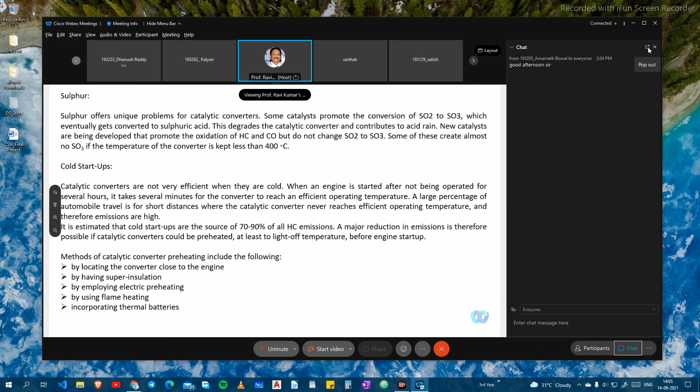We are planning our examination on the 16th at 4:30. Hello? Yes sir. 4:30 to 4:50, it's okay sir, for 20 minutes. The syllabus is already announced, and there will be 20 questions. It's 4:30 to 4:50, it will end. Total will be multiple choice only, a minor examination.

Okay, then I will start this thing, so my class today. Today we'll discuss about...

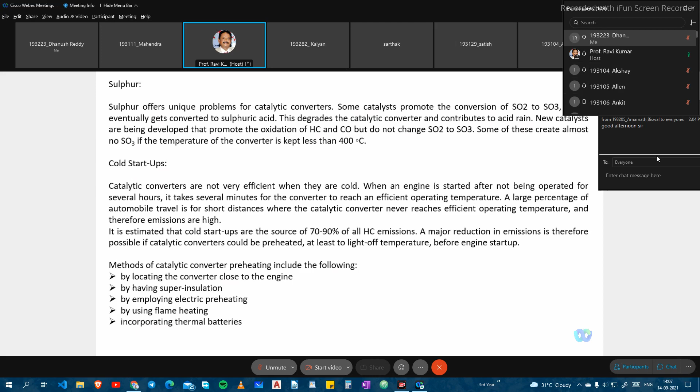This method of catalytic converter preheating includes the following: locating the converter close to the engine, having super insulation, employing electric preheating, using flame heating, and incorporating thermal batteries. Basically, we have discussed two-way and three-way catalytic converters and seen their design. The catalytic converter will help reduce emissions of NOx and SOx by having chemical reactions, and photochemical reactions will also be avoided by using this.

The most effective way, this is another way we are going to use exhaust gases. This is called the EGR method, exhaust gas recirculation method. The most effective way of reducing NOx emissions is to hold combustion chamber temperatures down.

Basically, around the combustion chamber we have heating and cooling, like a cooling system around the hot combustion chamber. Around the combustion chamber we have cooling pipes and a cooling system. That's why we always have to maintain the combustion temperature inside at the same level. The range should not exceed a certain limit. If you exceed it, you will get pre-ignition and a lot of problems.

You have seen this while discussing the combustion chambers, particularly regarding NOx and SOx emissions, because high carbon monoxide and hydrocarbons come out from the exhaust valve to the silencer, through the silencer. At the silencer end only we are going to have this. Before going to the charge, it will be heated through the exhaust gases. What happens if you preheat the air, or preheat the homogeneous mixture? That we will discuss today.

Probably the simplest and most practical method of reducing maximum flame temperature is to dilute the air-fuel mixture with a non-reacting parasite gas. The gas absorbs energy during combustion without contributing any energy input. The net result is a lower flame temperature. Any non-reacting gas would work as a diluent.

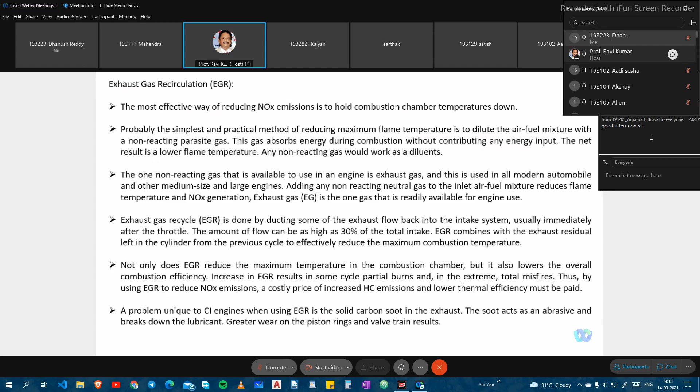Emissions may be divided into two groups: invisible emissions and visible emissions. Whatever you see in exhaust gas, particularly in diesel engines, is mostly soot formation, which has a smoke type appearance, and the smoke has a lot of things in it - this is visible.

Invisible emissions like NOx and SOx will not be visible to the outside, you cannot see them with the naked eye, but they react with the air producing a lot of things. We have carbon dioxide and water vapor, oxides of nitrogen, unburnt hydrocarbons, carbon monoxide, and aldehydes.

Carbon dioxide, water vapor - where you have a silencer end, you can see the small water vapors coming out. Oxides of nitrogen, unburnt hydrocarbons, carbon monoxide, aldehydes are invisible emissions. Smoke and particulates are visible emissions - small particles coming out are visible emissions. Out of various individual emissions, carbon dioxide and water vapor are considered harmless compared to others.

Carbon dioxide and water vapor may not be dangerous, but hydrocarbons and oxides of nitrogen, SOx and NOx emissions add to air pollution outside the atmosphere and cause a lot of damage to people, irritating the nose, causing bronchitis, and other health hazards from inhaling these emissions.

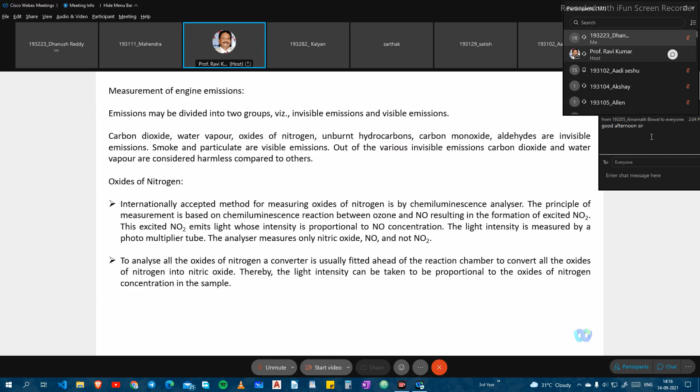This is called the chemiluminescence method for measuring oxides of nitrogen.

Basically, a photomultiplier tube is present, and a reaction tube is there where the sample gas is taken in. It passes through the NOx/CO converter, where a flow meter is also present to measure flow rate, and an O3 generator to produce ozone, showing how ozone is affected by NOx and SOx emissions. This goes to a reaction chamber, where the photomultiplier tube senses and provides total information on how many particles are coming out from the exhaust and what type of damage it causes to the environment.

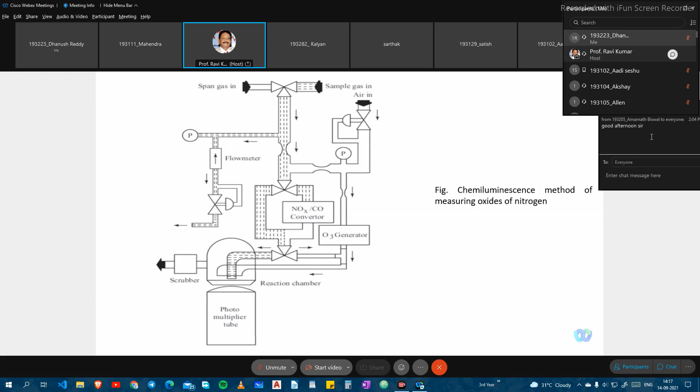Carbon monoxide can also be measured using the NDIR method of measurement.

The non-dispersive infrared analyzer, NDIR, as shown in the figure, is a widely accepted measurement instrument for measuring CO. In the NDIR analyzer, the exhaust gas species being measured are used to detect themselves. The method of detection is based on the principle of selective absorption of infrared energy of a particular wavelength peculiar to a certain gas, which is absorbed by that gas. This instrument uses non-dispersive infrared analysis for carbon monoxide measurement, as shown in the figure.

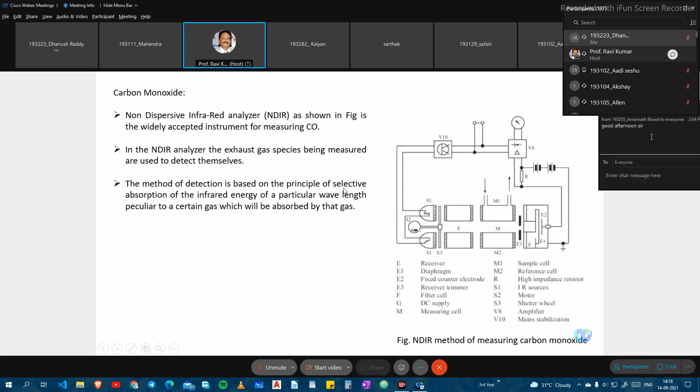Unburned hydrocarbons are also very dangerous, because whatever unburned hydrocarbons are available from the combustion chamber come out through the exhaust gases, and these lead to a lot of complications. For this, the flame ionization detector is used for measuring hydrocarbons.

This instrument, shown in the figure, is a well-established and accepted method of measuring HC. Ionization is a characteristic of HC compounds. The principle employed in the FID detector, flame ionization detector, is the formation of electrically charged particles, ionized carbon atoms, from the hydrocarbons in a hydrogen-oxygen flame. The resulting current flow, in microamperes, is measured and amplified to determine the concentration of hydrocarbons. This is one way to find the hydrocarbon percentage in exhaust gases using flame ionization detectors.

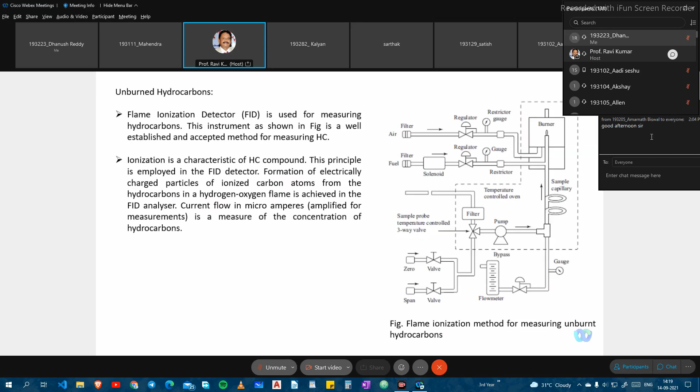Visible emissions, like smoke from a diesel engine, can be divided into three categories: blue, white, and black. Sometimes you get a blue flame, sometimes white, sometimes black. Smoke measurements can be broadly classified into two groups: the comparison method and the obstruction method.

In the comparison method, most ordinances regulating smoke emissions are based on estimating the density of smoke as it emerges from the exhaust, using smoke filters to measure what percentage comes out and what density it has.

It is also measured using a small filter paper method. Of several available methods, one commonly used is the Ringelmann chart, which shows four shades of gray as well as pure white and all-black sections.

To overcome the difficulty of reproducing various shades of gray, the intermediate shades are built from black lines of various widths. The four intermediate charts are printed by the United States Bureau of Mines on a single sheet, like a 70 centimeter by 25 centimeter sheet. This may be reproduced as follows.

Zero is all white, where there is no smoke it will read zero. One: black lines will be 1 mm thick at 10 mm apart, leaving white spaces 9 mm square - that is the measurement criteria given. Lines 2.3 mm thick, spaces 7.7 mm square. Lines 3.7 mm thick, spaces 6.3 mm square. Lines 5.5 mm thick, spaces 4.5 mm square. In all, 5 will indicate all black.

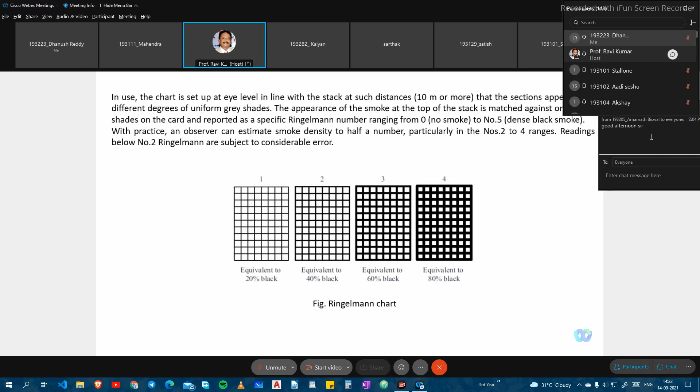We have another method. It is basically divided into light extinction type, continuous filtering type, and spot filtering type - these are the different ways of measuring the exhaust gases.

In this method, we have a photoelectric cell and a light source, and the exhaust smoke will be entering between them. The photoelectric cell absorbs the light, and based on the smoke density and so on, an indicating meter gives the smoke level. The light extinction type of method tests the intensity of the light beam as it is reduced by smoke, which gives the measure of smoke intensity.

Basically, when we take a vehicle for pollution testing, at the pollution testing center they connect a pipe to the exhaust tail pipe, and check it in different ways.

One is the acceleration method. We give a slow acceleration and check the levels of pollution. And if you give higher acceleration, and see how the flame comes out from the exhaust, it can be measured in two ways.

The exhaust sample is continuously passed through a tube about 45 centimeters in length, which has a light source at one end and a photo cell at the other end, as shown in the above figure.

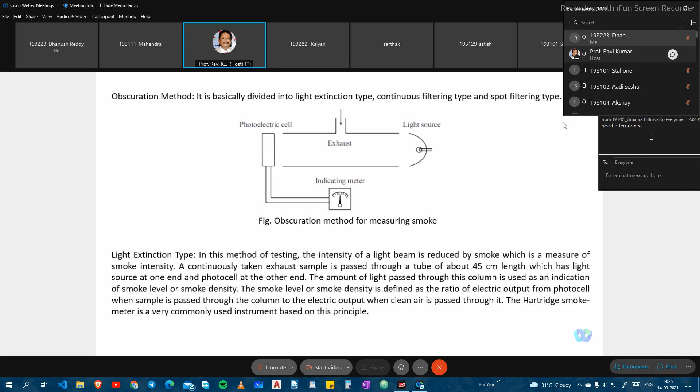It is a very commonly used instrument based on this principle. This is about the Hartridge smoke meter - a very initial stage method for checking pollution levels. Now we have much better instrumentation available for knowing pollution levels at various stages.

In this instrument we have a light source, an arm in between, an arm control knob, a clean air tube for reference, a clean air inlet, and a clean air blower, along with waste smoke of exhaust. When the waste smoke of exhaust comes in, there is a water drain, a smoke inlet for waste smoke, and a photoelectric cell to sense it and determine the density of the pollutant.

This is called a smoke meter, and it has different stages. The smoke spreads inside the meter and gives density readings at different stages, like initial acceleration and full acceleration - we call these initial throttle and full throttle opening. When you accelerate, the throttle opens fully and full fuel exhaust comes out for these higher engine operating conditions.

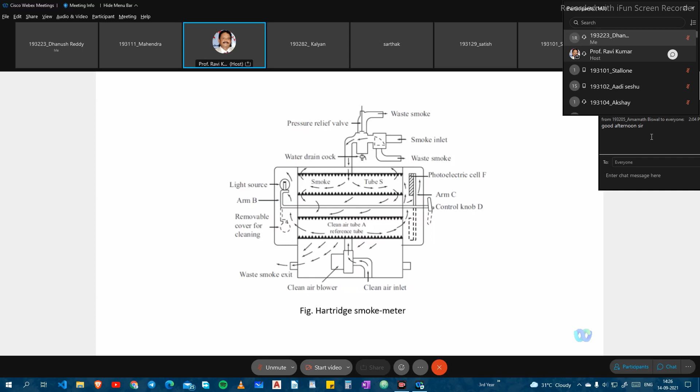In the continuous filtering type method, provision is made for continuous readings, observing transient conditions and measurement of smoke density achieved by continuously passing exhaust gas through a moving strip of filter paper and collecting the particles. Initially, in the initial stage, we have a small filter paper kept at the exhaust pipe, and from the deposits on it, we can measure the density.

This is a continuous type of paper. Initially in the 90s, 92, 95 we used to have a paper method to find out pollution levels. Later on, pollution equipment came up with the demand, particularly the Hartridge smoke meter, which gives very good results depending on your smoke density levels.

We also have the spot filtering type - a smoke stain obtained by filtering a given quantity of exhaust gas through a filter paper, which is used for the measurement of smoke intensity.

Here we have the exhaust with a filter tape or filter paper, through which we pass the gas, using a piston-cylinder arrangement. The piston automatically moves slowly outward, and because of this a lot of deposition occurs on the paper, allowing us to get the smoke density levels.

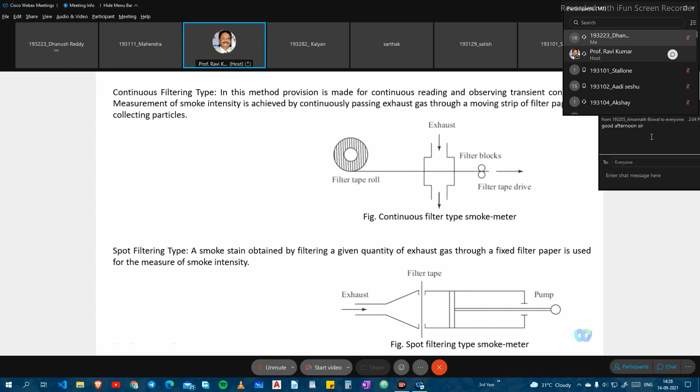Noise is also very important. If you've observed, whenever your silencer has a problem and you remove it, listening to the engine sound is very disturbing. It can interfere with radio frequencies, TV frequencies, and mobile frequencies, causing a lot of disturbance. So every two-wheeler or four-wheeler is connected to a silencer.

The silencer kills the sound and absorbs flames through flame arresters. NOx and SOx emissions are also reduced through passing through different stages of the silencer. The noise is maximum without it. Noise is a mixture of various sounds, which is a source of irritation for listeners.

Sound is created by a vibrating object. Since the engine has a lot of moving parts, because of combustion and the piston moving from top dead center to bottom dead center, a lot of vibrations come to the engine, and these vibrations also produce sound, causing a lot of irritation from various sources.

The vibrations are transmitted to the surrounding air in the form of pressure waves. The frequency and intensity of these pressure waves are within a specified range - around 15 to 15,000 hertz of sound, measured in decibels, with an intensity range of 0 to 120 decibels.

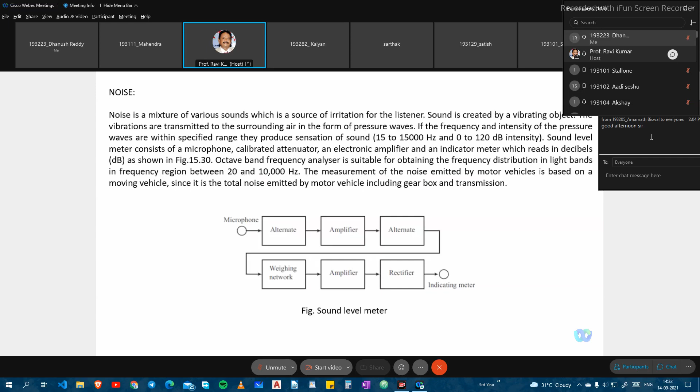Now we'll go to the emissions. What are the emissions? How are the emissions decided and who decides them? Basically, in India we don't have any standard of our own, we are following the European standards. Europeans decide for the throughout the world. European standards are followed by many countries, that's why we call them Euro norms.

We have changed the name, so based on European standards we have Bharat Stage 1, Stage 2, Stage 3, and at present we are using Stage 4. European countries follow very standard norms, which we converted into Bharat Stage 1, Bharat Stage 2, and BS emissions. We put a lot of names to the standard, but basically the standards are taken from the European standards only, and in these pollution norms we call it Bharat Stage or BS norms.

Emission standards are government instituted emission standards that all motor vehicles have to comply with if they are to be sold and driven in India. Presently India follows the Stage 3 and Stage 4 norms. Whatever vehicle is coming out for registration should follow the requirements of Euro 4 norms, and those modifications have made vehicle rates heavy.

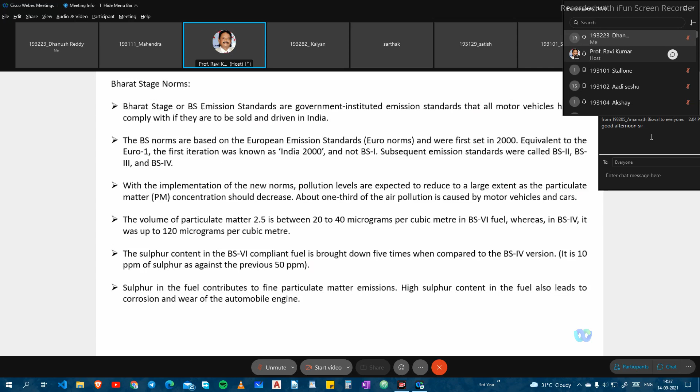The sulfur content in BS6 compliant fuel is brought down 5 times compared to the previous version. It is 10 ppm of sulfur as against the previous 50 ppm. Bharat Stage 6 gives 10 ppm of sulfur. Sulfur in the fuel contributes to fine particulate matter emissions, and high sulfur content also leads to corrosion and wear of the automobile engine.

Under BS6 fuel, for 1 kilometer, a car will emit 80% less PM and almost 70% less nitrogen oxide in diesel engines. For petrol engines, the emission of nitrogen oxide would be less by 25%, because BS6 uses a lot of emission controls, and the combustion phenomena also have modifications to give less emissions.

BS6 norms will lead to reduction of the emission of certain hydrocarbons that are produced because of incomplete combustion of the fuel. As discussed in previous classes about SI engine combustion and CI engine combustion, the percentage will increase if you use superchargers and turbochargers, and if you have a good oxygen percentage in the air, you will get good combustion.

BS6 fuel contains lesser air pollutants compared to BS4 fuel. The levels of poisonous, highly reactive gases that form when fuel is burned at high temperature, such as NOx and oxides of nitrogen, are expected to reduce.

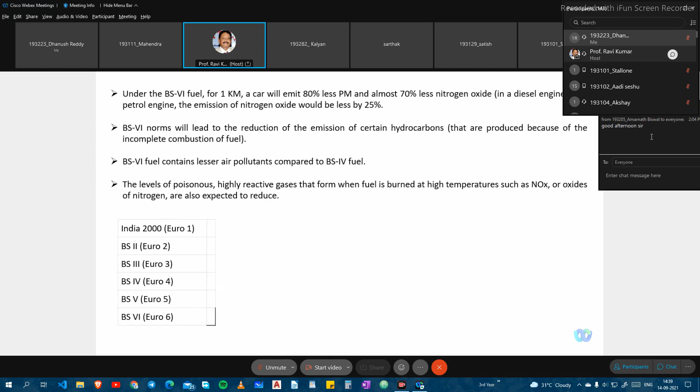In India, the 2000 year we had Euro 1 norms, BS2 has Euro 2 norms, BS3 is Euro 3 norms, and BS4 is Euro 4 norms. Now slowly we are moving to Euro 5 and Euro 6 norms. Already in all foreign countries, they are following Euro 6 or Euro 7 norms. When I visited to do my postdoc fellowship in 2007 itself, they were following the Euro 4 norms. Presently, after 15 or 16 years, we are following the Euro 4 norms.